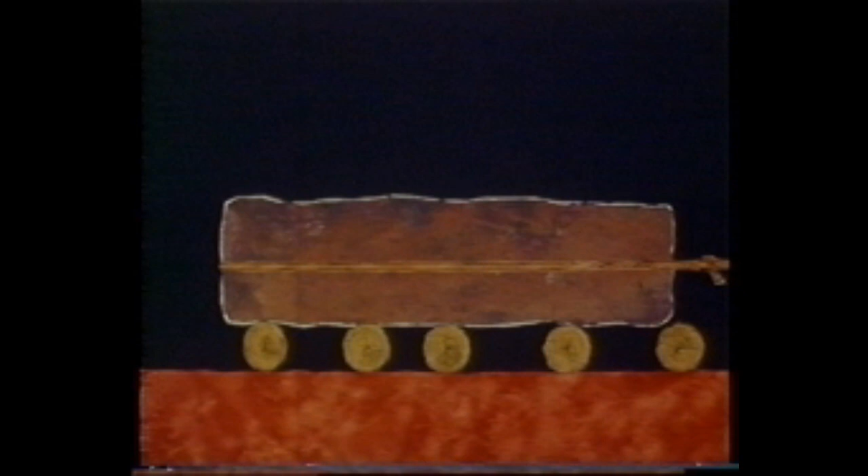Throughout history, man has striven to move large and small objects, sometimes over great distances, to where they would be better suited to his needs. Circular tree trunks used as rollers made the task of moving heavy objects somewhat easier. A way was then found of attaching the roller to the load, and so the wheel was evolved.

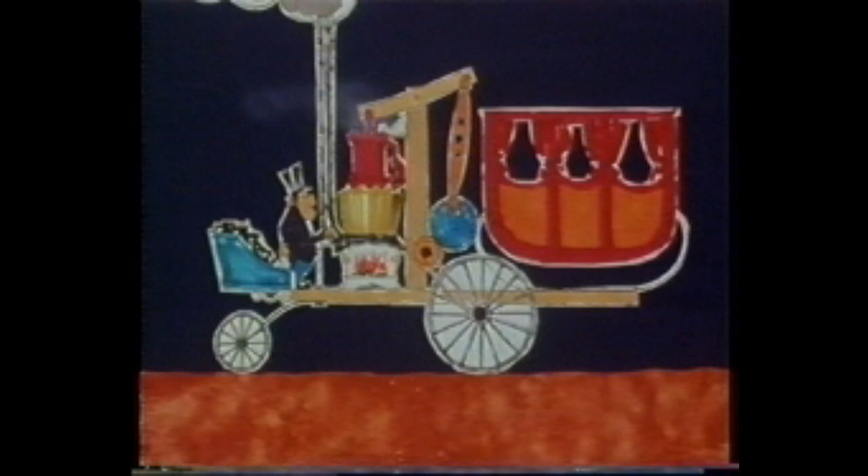It wasn't long before man tired of pulling his carts about. Looking for an alternative prime mover, he came on the use of animals. But like men, they proved to be temperamental, so other forms of motive power were sought. Eventually steam was recognized as a driving force, though not a very efficient one, so the search for improved performance continued.

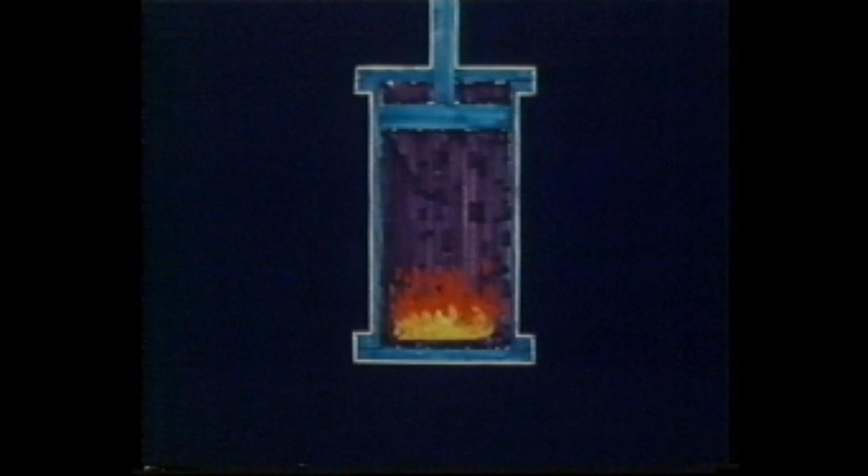An idea to burn fuel inside the engine cylinder led to the development of the internal combustion engine. Attempts were made to burn a variety of fuels, including pulverized coal dust, coal gas, lamp oil, and even gunpowder.

In today's engines, the two most commonly used fuels are petrol and diesel oil, both of which are obtained by distillation of crude oil.

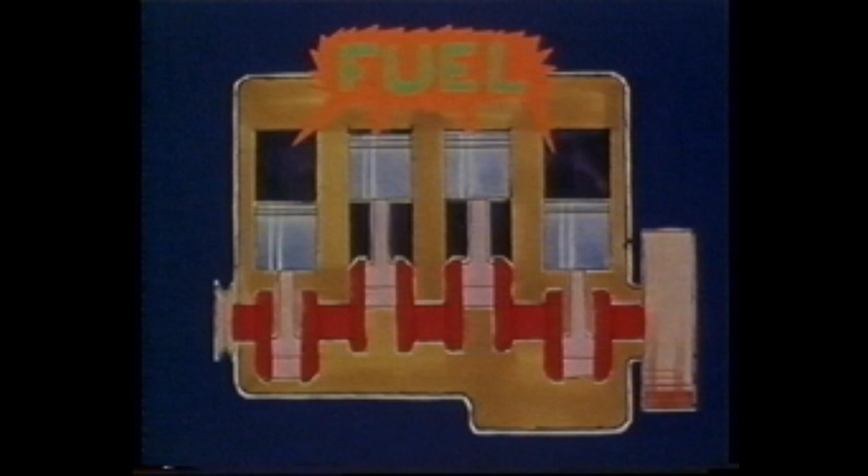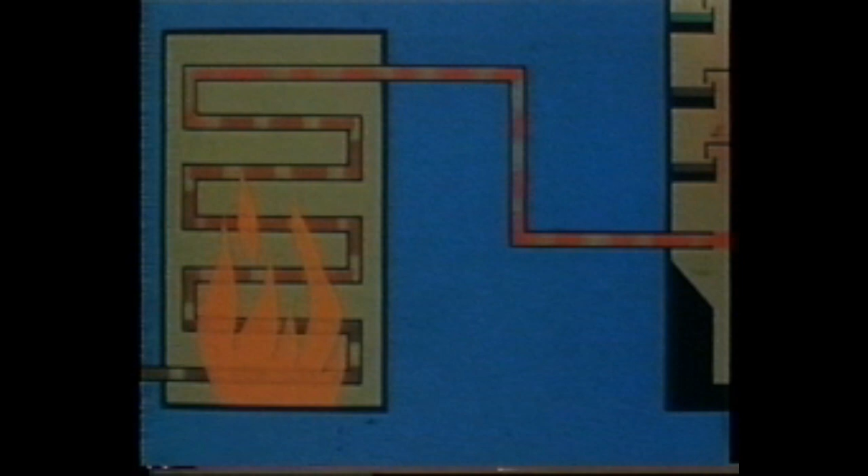Distillation, in simple terms, means that the crude oil is heated until its constituents reach their boiling points. The vapors that are given off by the boiling crude oil are passed into a tower. Because these vapors are of different densities, some rise more than others within the tower. As they cool, they revert to liquid, which is collected in a series of trays at various heights.

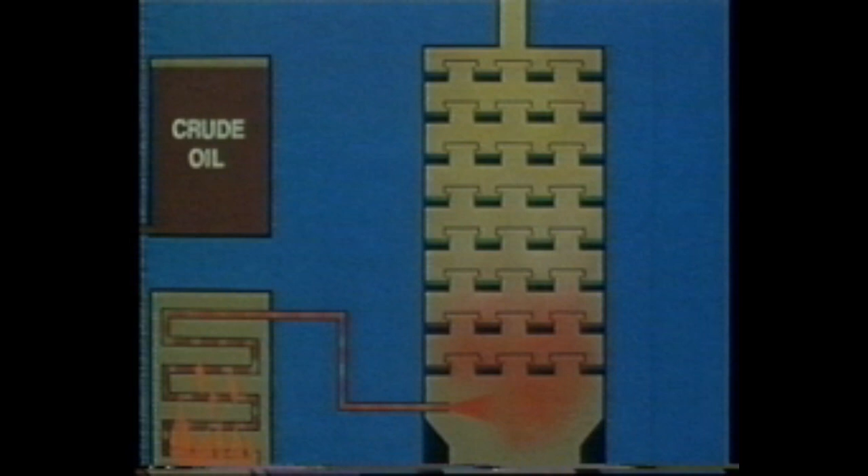From near the base of the tower, the heavier oils used in lubrication are removed, whilst higher up, lighter oils such as diesel oil are obtained, and near the top of the tower, high-grade petrol. There are, of course, many other fuels and petroleum-based products obtained from trays between those shown.

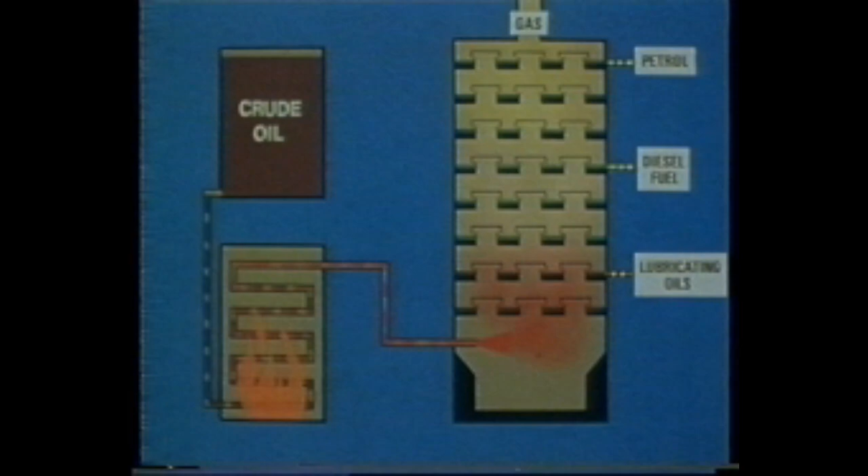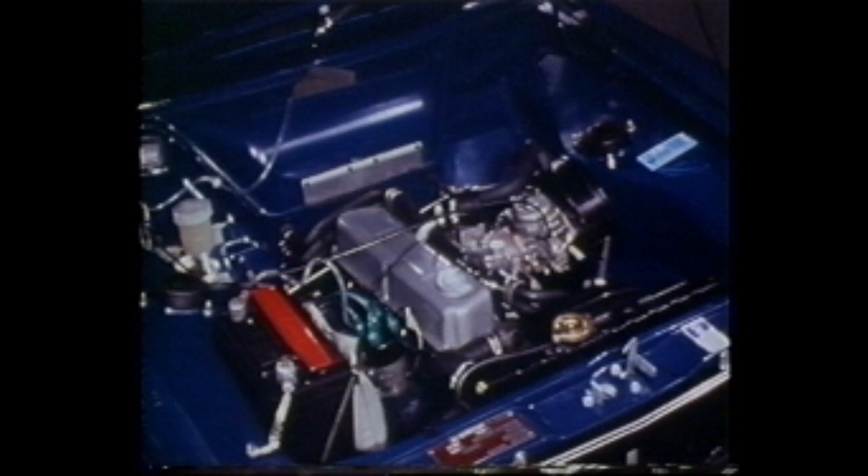Neither petrol nor diesel fuel enters the working cylinders of an engine in a normal liquid state. In the case of the petrol engine, fuel is reduced into fine droplets by a carburetor, which also mixes the fuel with air before it's burned in the engine cylinders.

In a four-stroke engine with the inlet valve open and the exhaust valve closed, the first stroke of the piston draws the fuel-air mixture into the cylinder. This is the induction stroke.

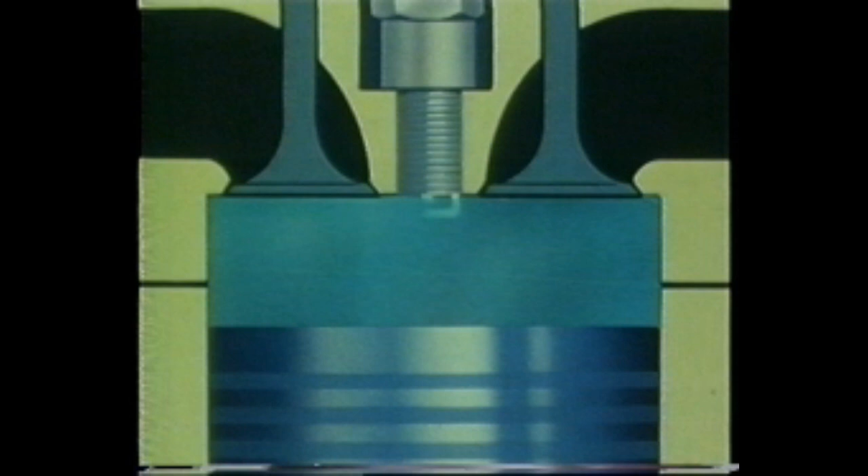The inlet valve then closes, the piston rises and compresses the mixture. The mixture is then ignited by a spark jumping across the electrodes of the spark plug. The burning gases expand and force the piston down. This is the power stroke.

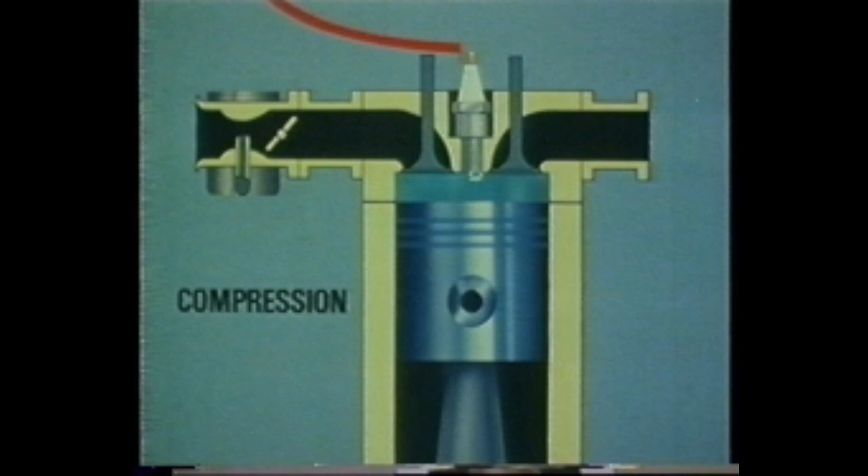At this point, the exhaust valve opens, the piston rises and the burnt gases are expelled. This is the complete four-stroke cycle: induction, compression, power, exhaust.

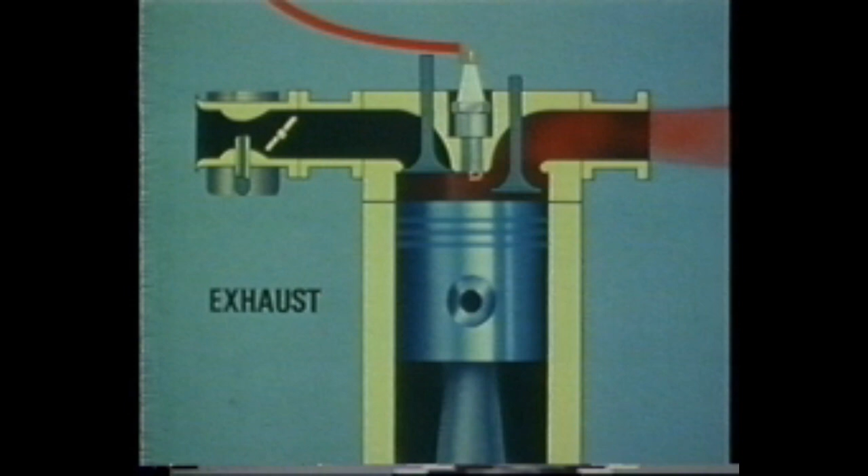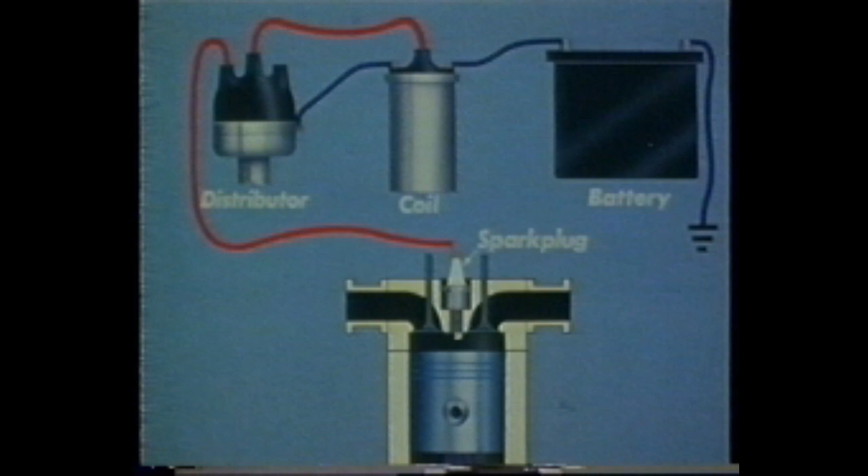The diesel engine looks very much like the petrol engine, but in several important respects, it's quite different. The diesel does not require a carburetor. The electrical ignition system and the spark plug are also unnecessary.

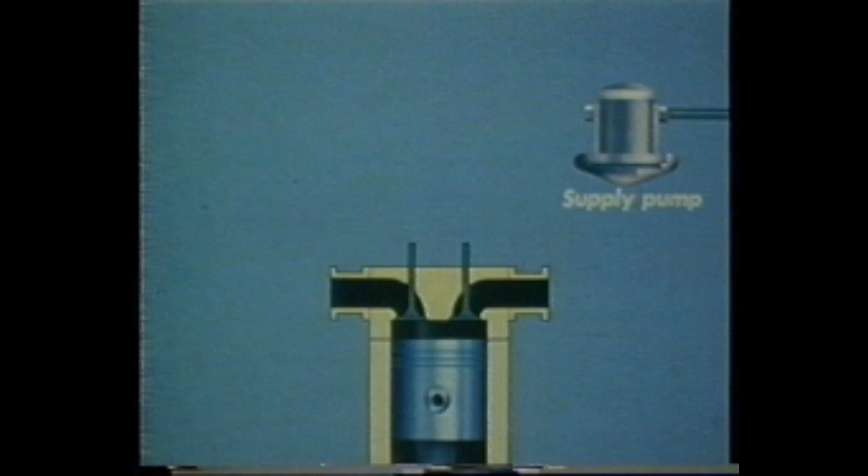However, the diesel does require fuel injection equipment. This consists of a supply pump, a fuel filter, and an injection pump, which feeds fuel to the engine cylinders through the injector.

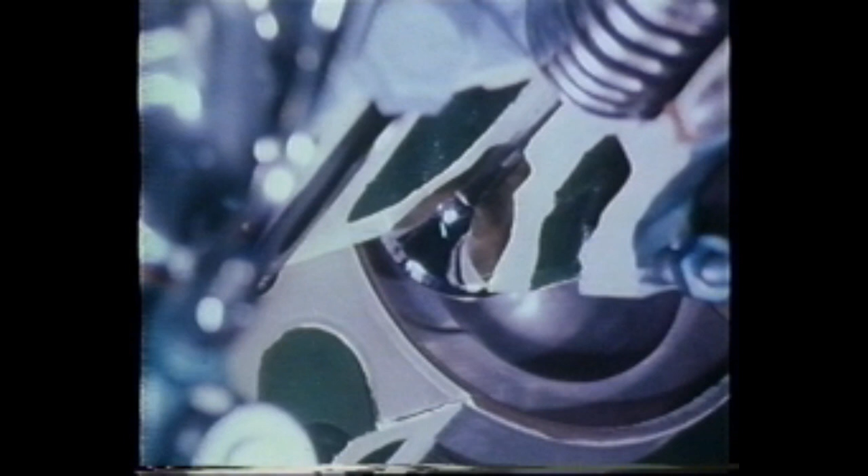There's one other significant difference. The diesel engine has a much higher compression ratio. In fact, the volume between the crown of the piston and the cylinder head at top dead center is usually less than half that of the petrol engine.

In a diesel engine, when the piston moves down on the induction stroke, it draws in not a fuel mixture, but filtered air. On the compression stroke, this air is squeezed into the small space at the top of the cylinder and is compressed to something like 1/20th of its original volume.

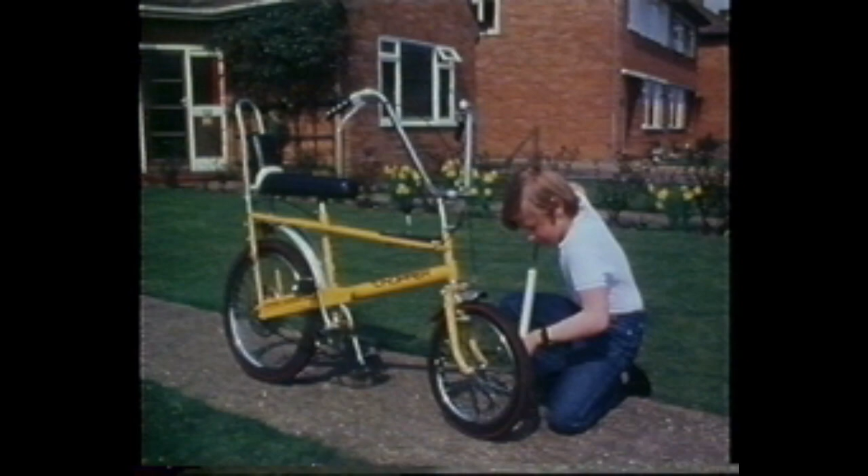As the air becomes compressed, so its temperature rises. This can be demonstrated when a flat tire needs pumping up. It's not just the boy who gets hot. The pump and connections also become heated as the air drawn into the pump cylinder is compressed and forced through the connection into the tire.

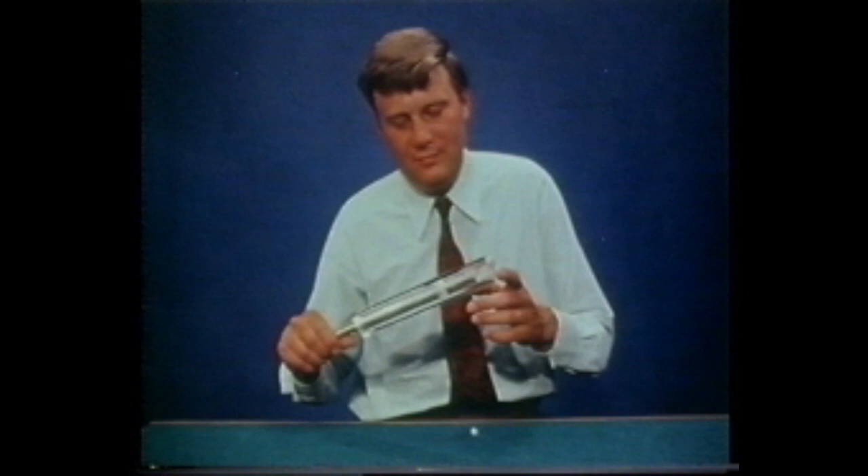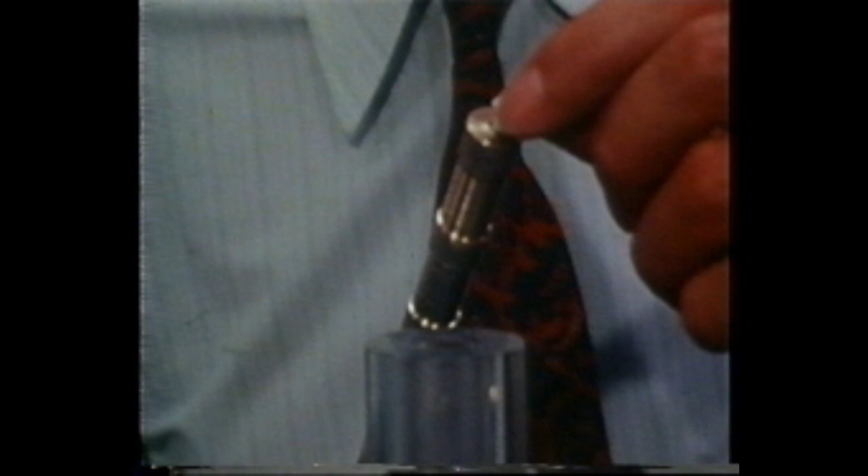A more striking example is a pneumatic match, which consists of a tight-fitting piston, a tube, and some tinder, which is placed on the end of the piston. Air is compressed on ramming the piston into the tube. Sufficient heat is generated to cause the tinder to smoulder, which with gentle persuasion bursts into flame.

The fact that air becomes heated on compression is used as the basis for the diesel principle. The temperature of the air within the cylinder reaches at least 500 degrees centigrade.

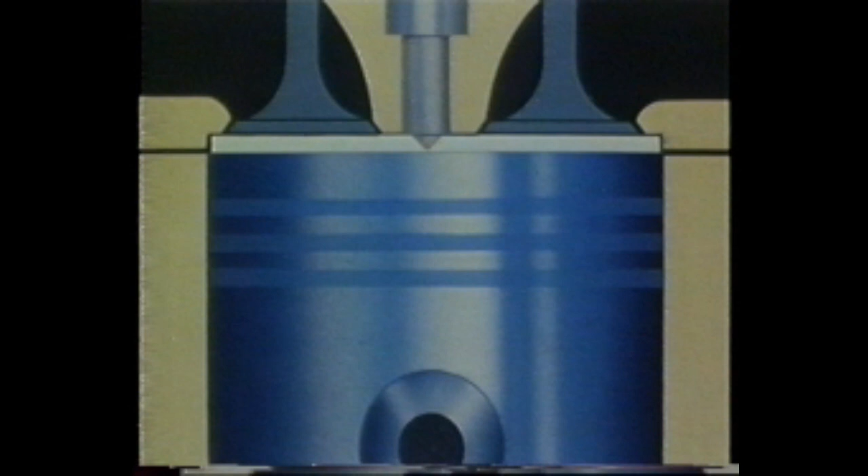It's at this point that the fuel is injected as a fine spray or mist. It then ignites without requiring a spark, and the expanding gases force the piston down on the power stroke. As the piston rises, the burnt gases are expelled. The full cycle once more.

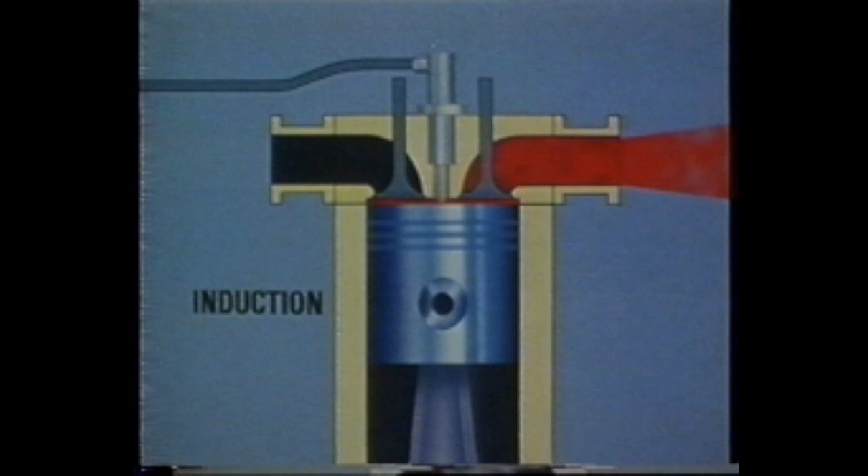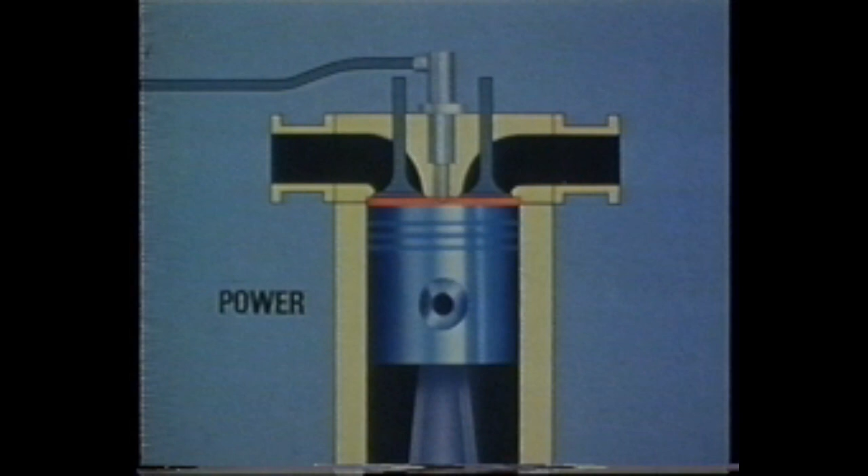Induction, drawing in just air. Compression, causing the air to reach a high temperature. At this point, the fuel is injected. The power stroke, as the burning gases expand. And finally, exhaust.

When cylinders are joined together to form a multi-cylinder unit, the power is also multiplied. In this way, engines can be made to suit a wide variety of power applications.

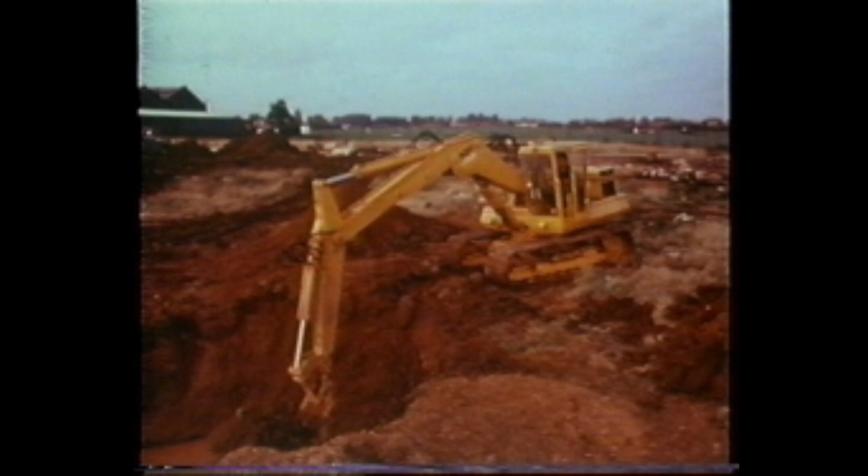The diesel's ability to maintain its power as the load increases makes it the universal choice for construction machinery. A different kind of performance is needed for road vehicles, where speed and loads vary continuously throughout the work period. Whether in long-distance haulage or door-to-door deliveries, diesel engines provide the most economic source of power.

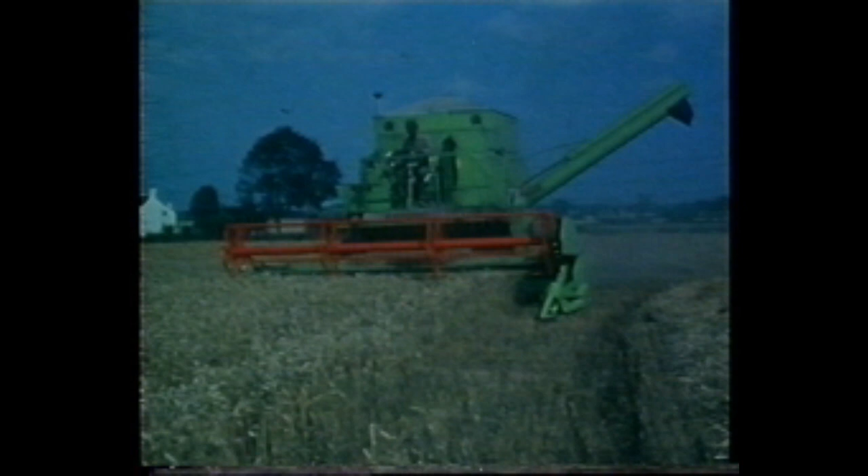But it's in food production that the diesel has made a great contribution. Harvesting, for instance, requires constant power with great reliability to gather in the shortest space of time the fruits of a year's work on the land. Throughout the world, diesel engines provide reliable and economic power.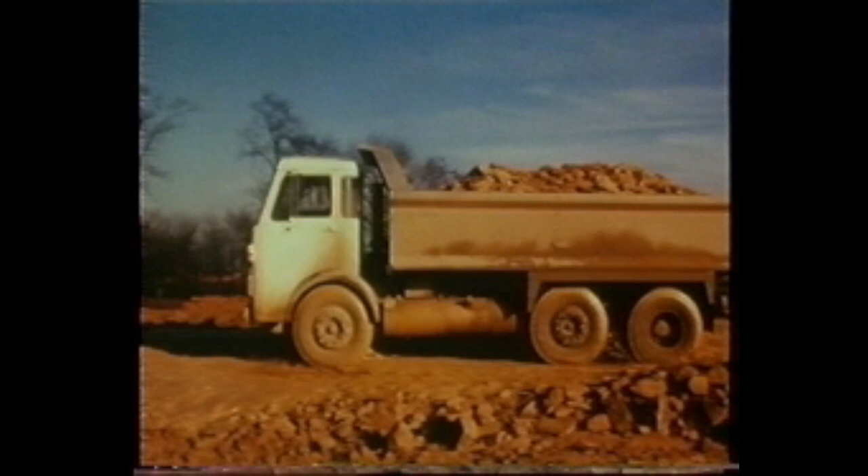The diesel engine is the accepted self-contained power unit for the modern railway. It also provides fast, flexible and reliable power for light and heavy transport on and off the highway. In marine craft of all types, it adds safety and reliability to performance. Construction, earth moving and road building all rely on this form of power.

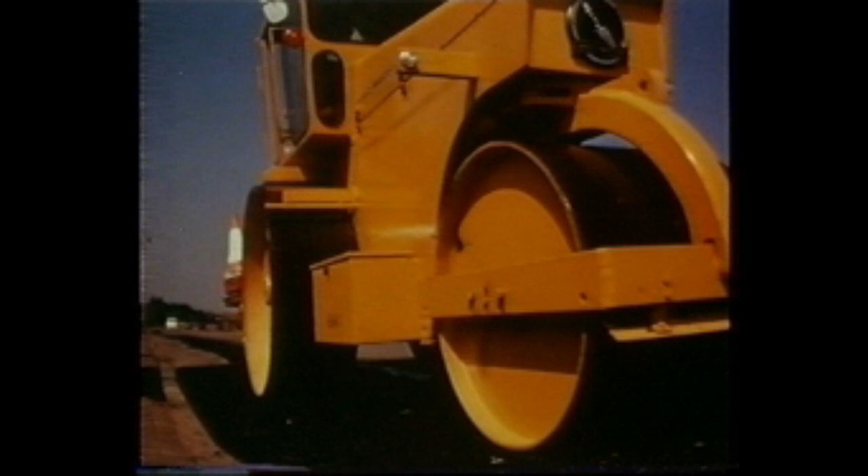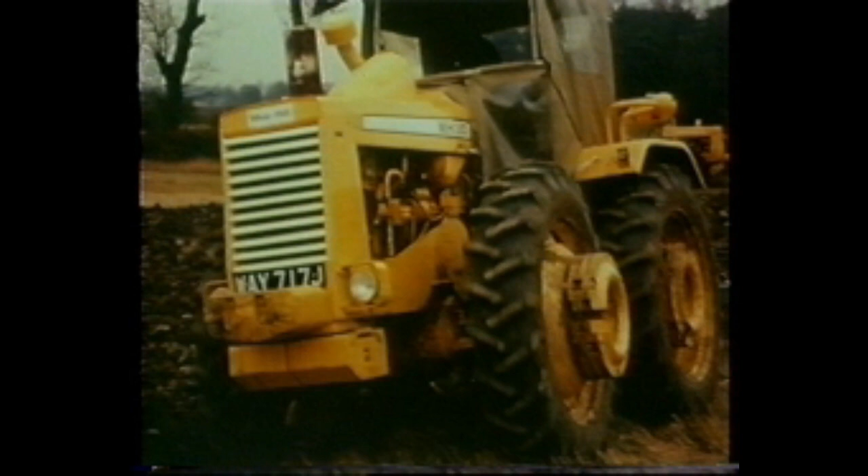In agriculture, all over the world, diesels are raising food production and living standards.

Now the diesel is a prominent member of a family of engines, heat engines. They all have a common purpose, to convert heat energy from fuel into useful mechanical work. All heat engines waste a proportion of the available energy in the fuel, but some waste more than others.

For example, diesel engine exhaust gases account for a heat energy loss of 24%. The cooling system and fan lose another 31%. Friction between moving parts and ancillary equipment account for another 11%, which leaves 34% for useful work.

Thermal efficiency differs with each type of engine. The lowest is the steam engine at 8%. The simple single-shaft gas turbine is next at 16%. The steam turbine rates 28%. A good petrol engine, 23%. So with 34%, the diesel is clearly a leader in fuel utilization.

In an internal combustion engine, a principal factor in the extraction of work from fuel is the compression ratio. This is the total volume of air drawn into the cylinder by the piston on the induction stroke, divided by the volume above the piston at the end of the compression stroke.

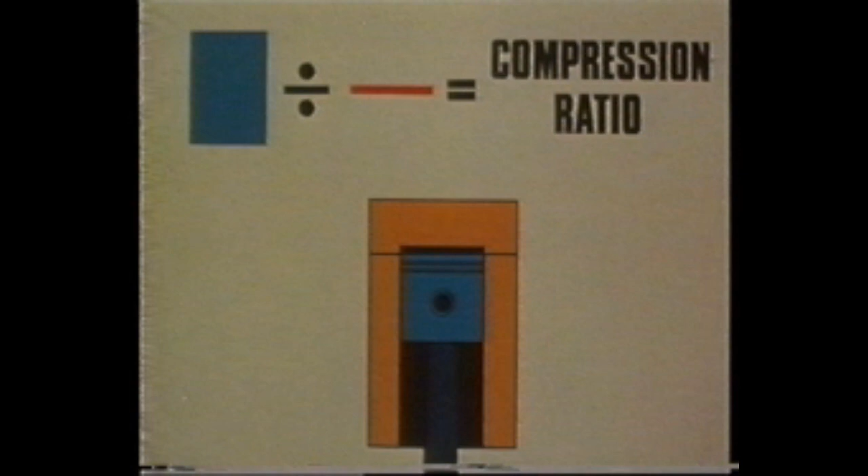The diesel engine has a compression ratio approximately twice that of a petrol engine.

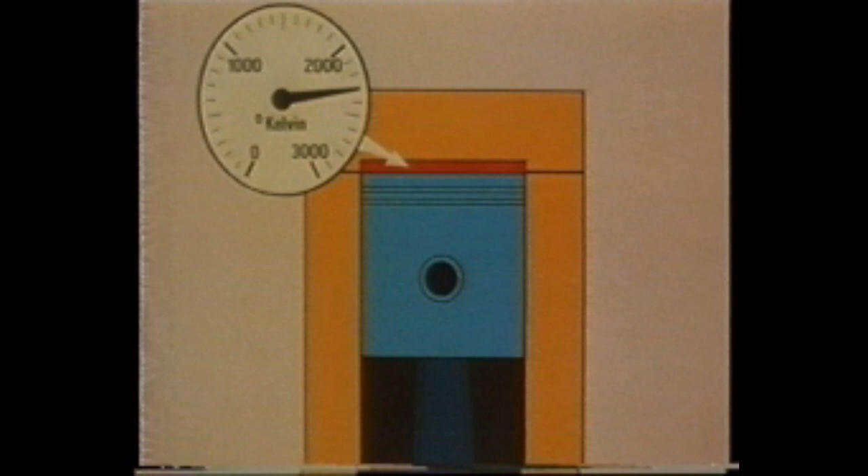The performance of all heat engines is determined by the drop in temperature of the gases during the power stroke. The temperature at combustion is approximately 2,300 kelvins. Because gas loses heat in relationship to the amount it's made to expand, at the end of the power stroke, it's at approximately 900 kelvins. This difference in temperature is a measure of the engine's thermal efficiency.

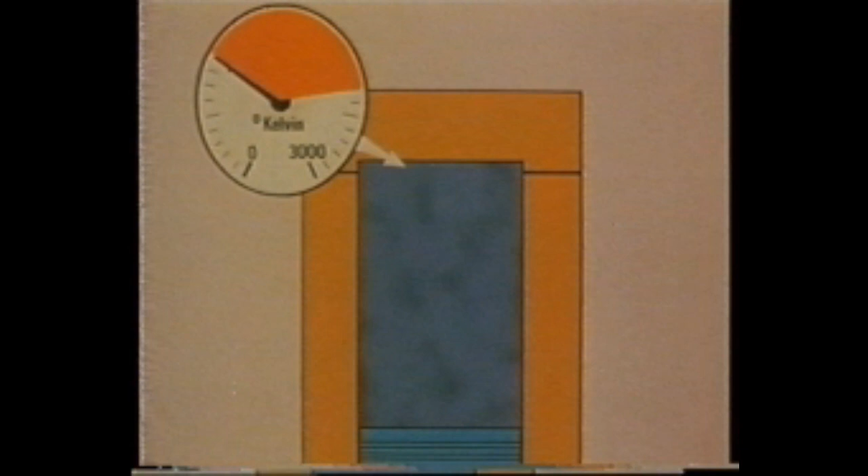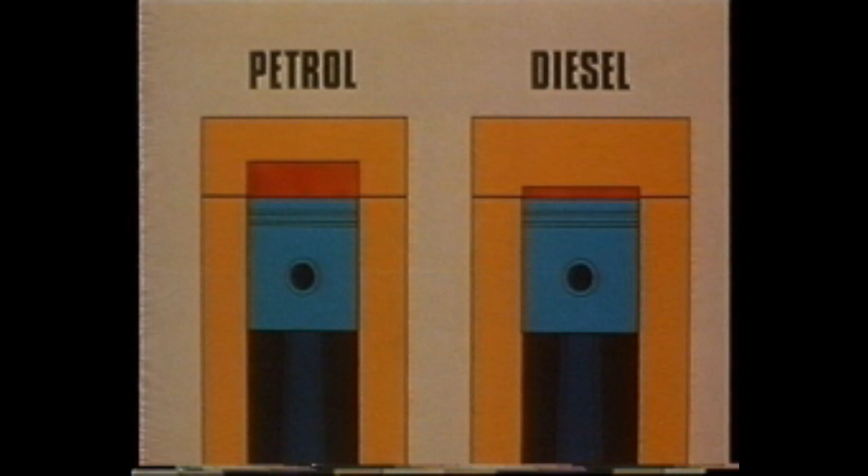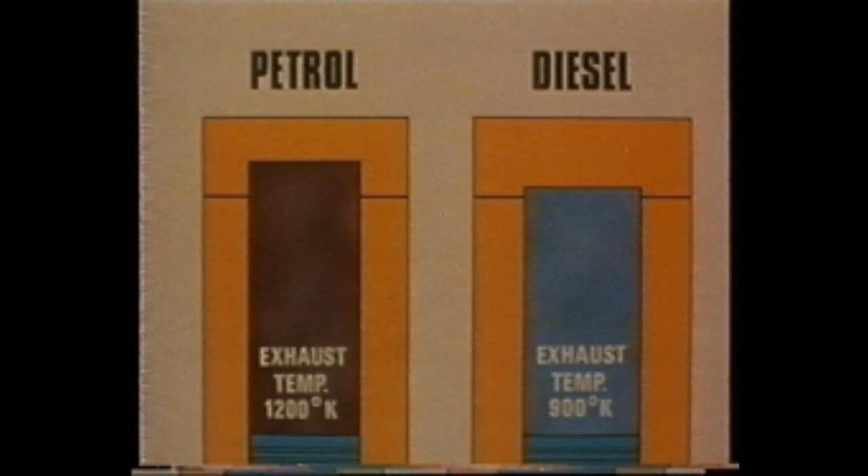From this, it's clear that the expanding gas plays an important part in this cycle. In the diesel, the gas starts in a more highly compressed state than in the petrol engine. On combustion, it therefore expands through a greater range, finally to exhaust at a lower temperature. When the efficiencies are compared, the diesel is shown to be the most economic.

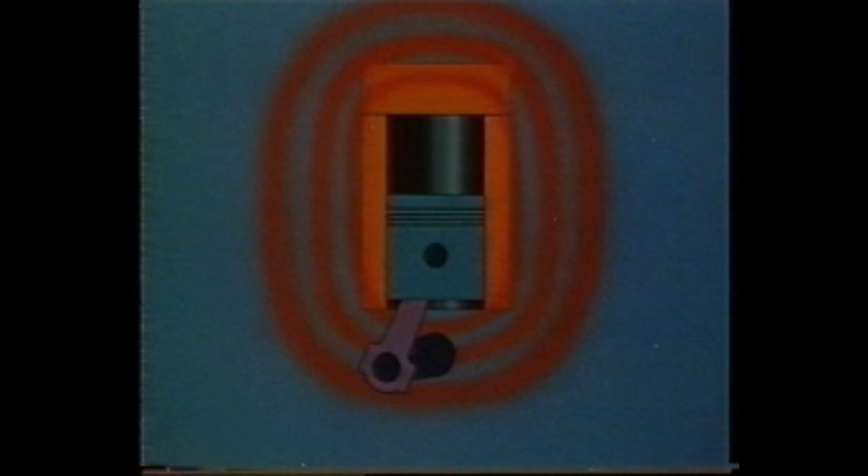It's important, however, that the remaining heat absorbed by the engine structure is controlled by a suitable cooling system. This is demonstrated in this laboratory exercise, where an engine will be deliberately overheated until component failure occurs.

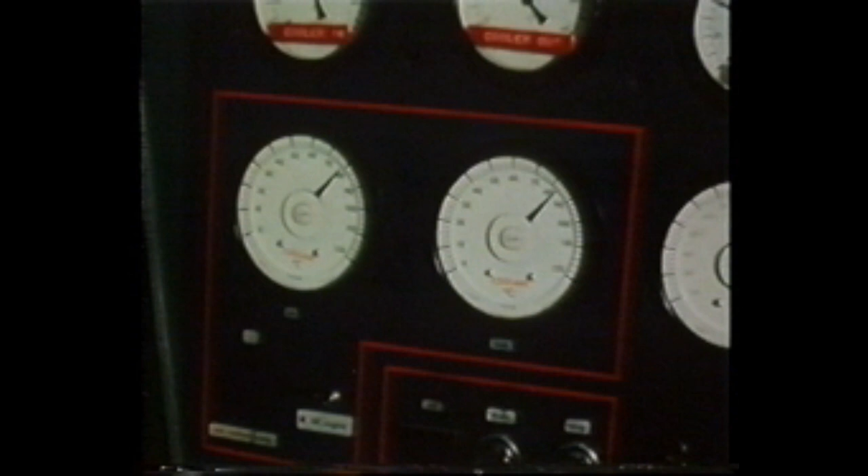First, the engineer checks that all systems are functioning normally. The load on the engine is then increased and the throttle setting advanced to maintain the engine speed. An immediate rise in temperature is shown on the gauge as the engine is made to work harder.

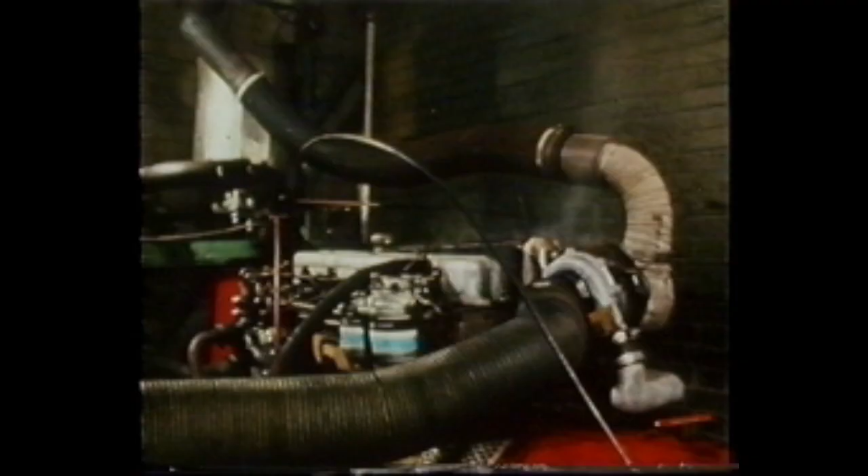The coolant flow is then restricted, and a further rise in temperature is indicated. Eventually, the engine grinds to a halt as running clearances are taken up by expansion and the properties of the lubricant are broken down.

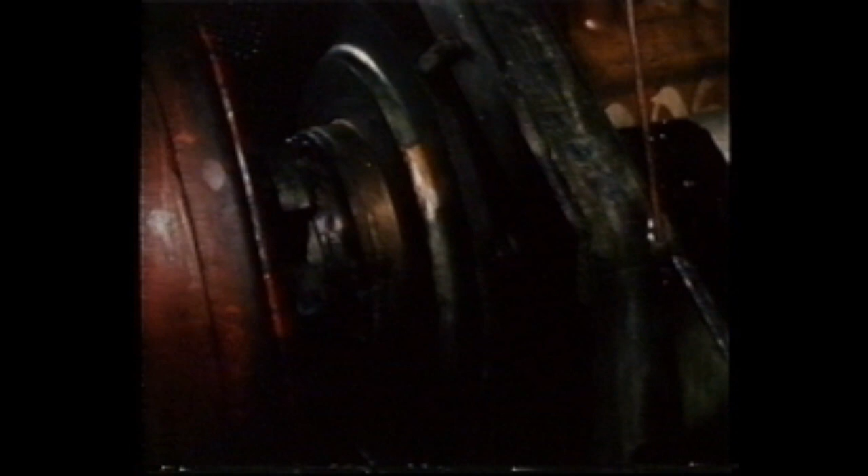This piston, removed from a test engine, shows clearly the effects of coolant and lubrication failure. It's essential to keep the engine temperatures within working limits. By far the commonest system is liquid cooling, in which the coolant is pump circulated round the hot surfaces and through a radiator to be cooled.

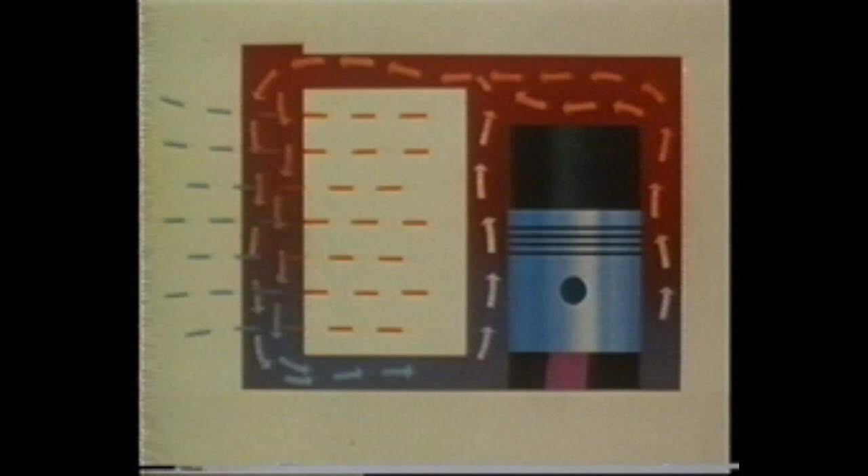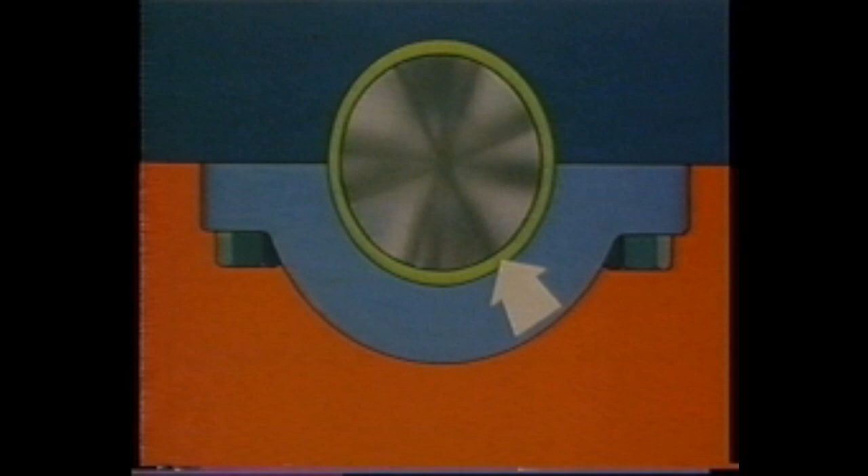Excessive friction and metal-to-metal contact is prevented by providing a film of oil between all moving surfaces. The oil pump is an important component in providing an adequate flow of lubricant. The compact and very efficient lobe type is shown here.

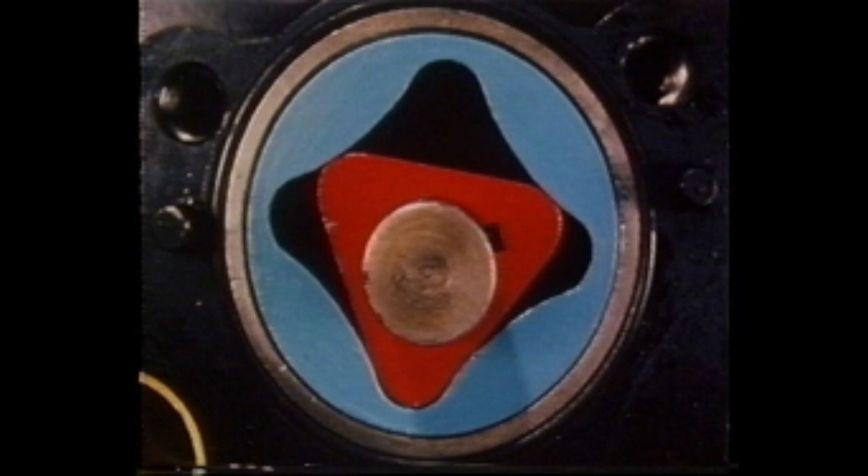The pump circulates oil under pressure through a filtering unit to the main, big end and camshaft bearings. The reduced flow lubricates valve guides, tappets and the timing gear train.

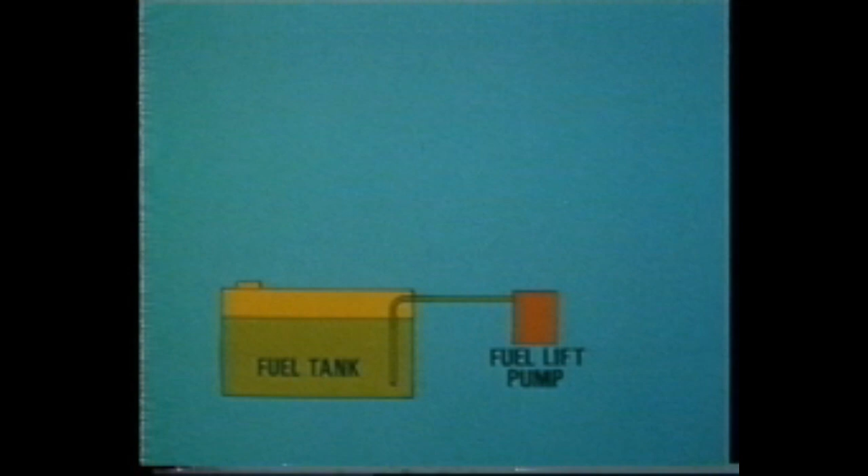The next important function is that of the fuel system, which consists of a fuel tank, a lift pump, a filter, a fuel injection pump, the output of which is controlled by the operator through an overriding speed governor, and the injector or atomizer.

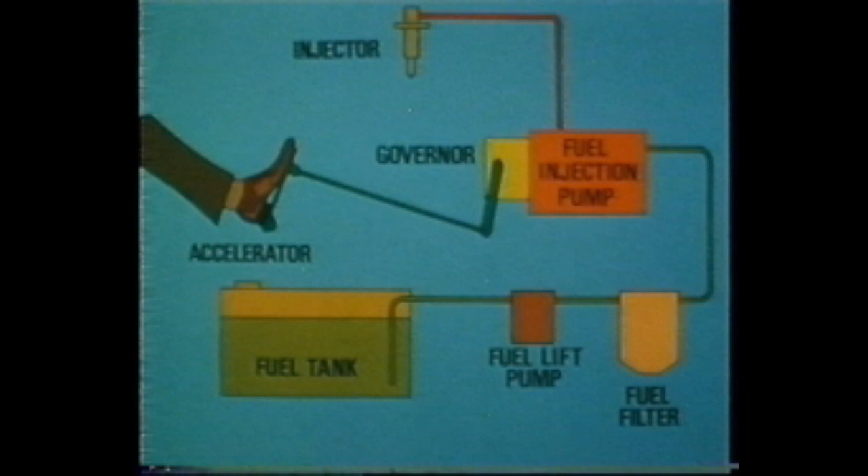The two main types of fuel injection pump in use are referred to as inline and rotary. This one is an 8-cylinder inline pump.

The inline pump consists of a series of cam-operated plungers, one for each engine cylinder, each plunger being moved up and down in its barrel by the appropriate cam lobe. To vary the engine speed, the plunger is rotated in its barrel by a linkage connected through a speed governor to the accelerator pedal.

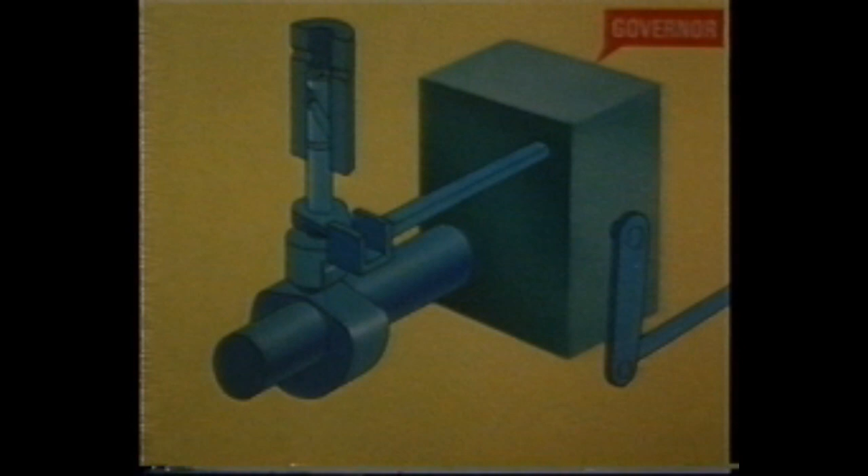The amount of fuel delivered, and thus the engine speed, depends on the relationship between a helical groove machined in the plunger and the fuel exit port, or spill port. This is a cross-section of a pumping element and fuel supply gallery in which fuel at low pressure is shown in yellow.

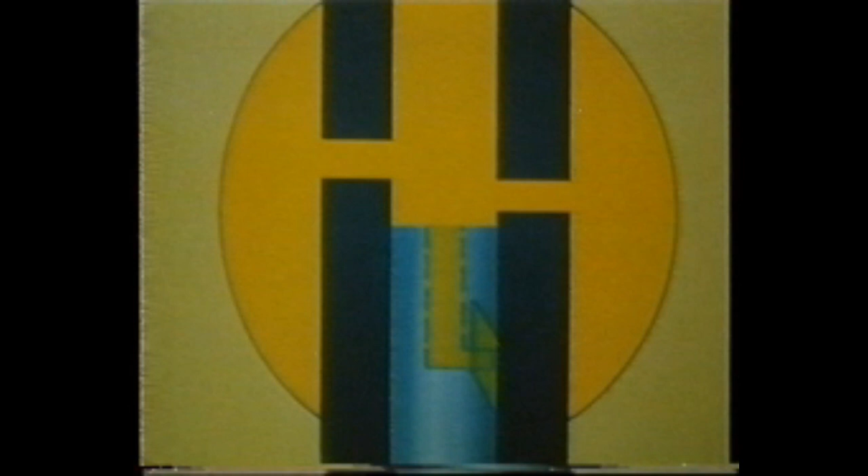As the plunger moves upwards, the spill port and supply hole are closed, so that fuel, now shown in red, rises in pressure until the resistance of the spring holding the injector needle closed is overcome. This is the point of injection, and the fuel continues to be delivered until the helical groove aligns with the spill port, allowing the pressure to fall.

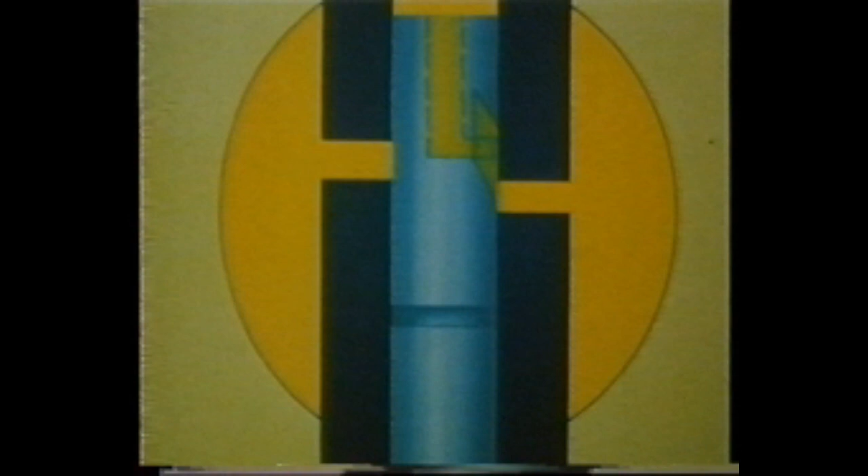It can be seen, therefore, that by rotating the plunger, the relationship between the helical groove and the spill port can be changed, so that the power and speed of the engine can be varied by either increasing or decreasing the amount of fuel delivered.

The distributor-type injection pump has only one pumping element, and this is connected in turn to an outlet for each cylinder through a distribution rotor.

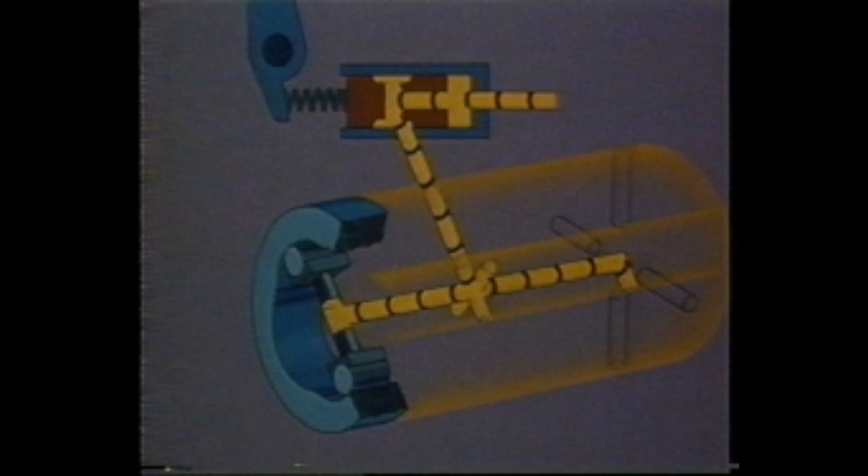Shown diagrammatically, a metering valve determines the amount of fuel delivered. This fuel, shown as yellow, passes to an inlet port and is admitted to an axial passage in the distributing rotor.

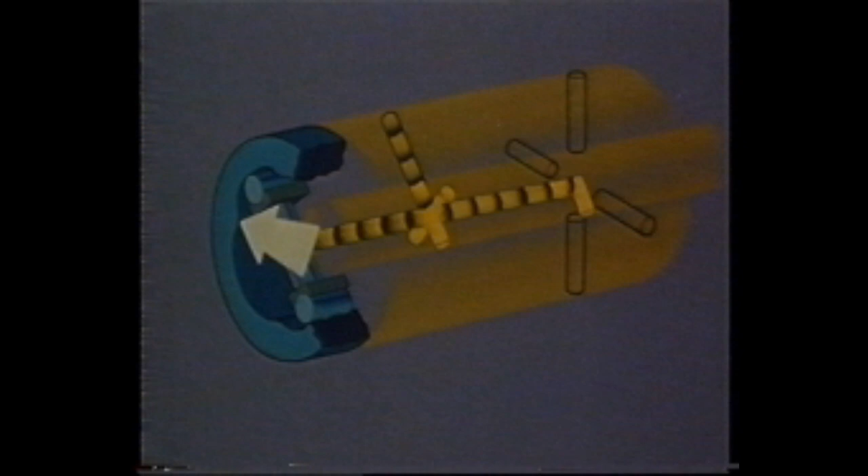The rotor, containing two plungers, turns within a cam ring. Lobes in the cam ring actuate the plungers, which apply pressure to the fuel, now shown in red. As the rotor revolves, a passage is brought into line with each outlet port in turn, allowing fuel to pass to the injectors at high pressure.

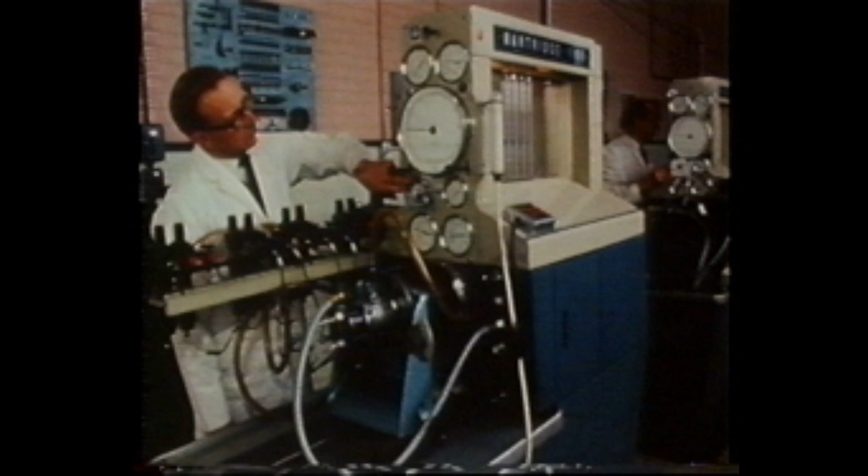The accuracy with which the fuel is measured by the fuel pump's metering system is carefully checked during manufacture and again before installation in an engine. Each outlet is fed into a calibrated container where it is compared with the standard laid down for the required engine performance. In this example, a 4-cylinder pump is under test.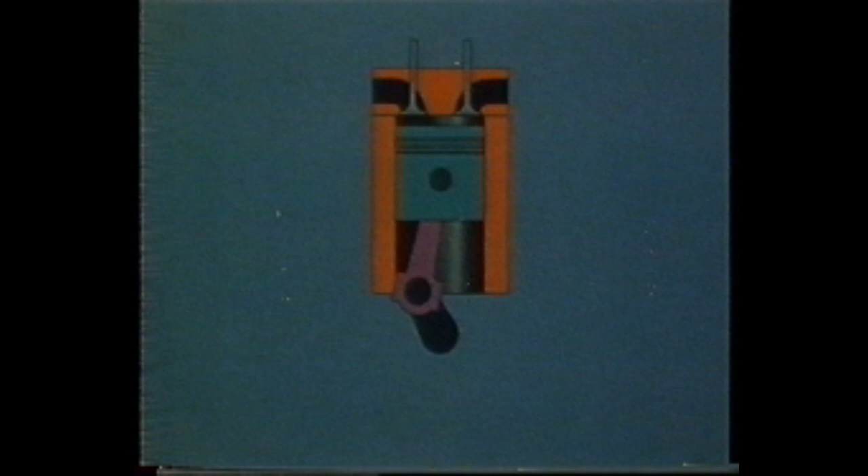Whichever type of injection pump is used, the important consideration is to deliver the fuel at the right time. To achieve this, a gear at the end of the crankshaft, through an intermediate gear, drives the camshaft, which actuates the inlet and exhaust valves.

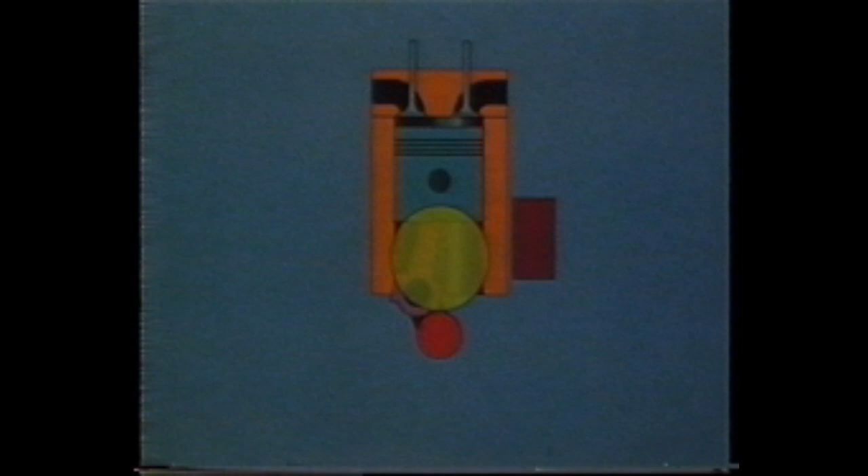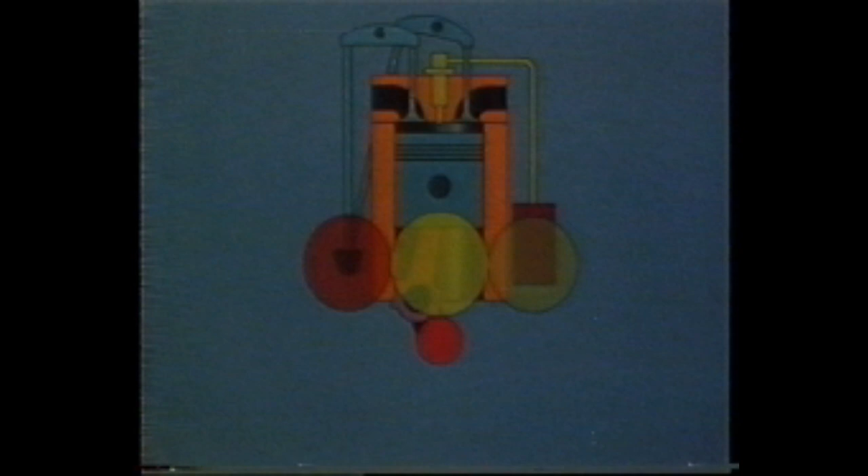The intermediate gear also drives the fuel injection pump and determines the exact time fuel enters the cylinder. In practice, fuel is delivered at a pressure of approximately 2,500 pounds per square inch when the piston is a few degrees before top dead center.

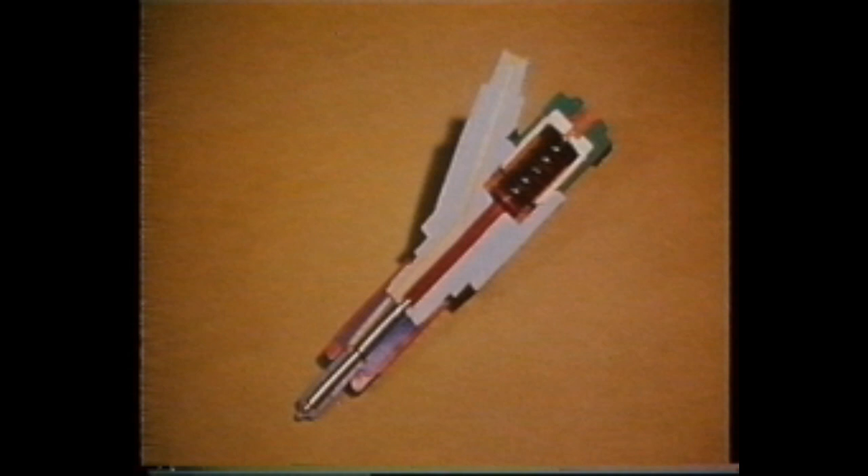Because diesel fuel will only burn readily when atomized, each cylinder is equipped with an atomizer or injector to break up the stream of fuel. This fuel must be mixed thoroughly with air drawn into the cylinder during the induction stroke and compressed by the piston during the compression stroke.

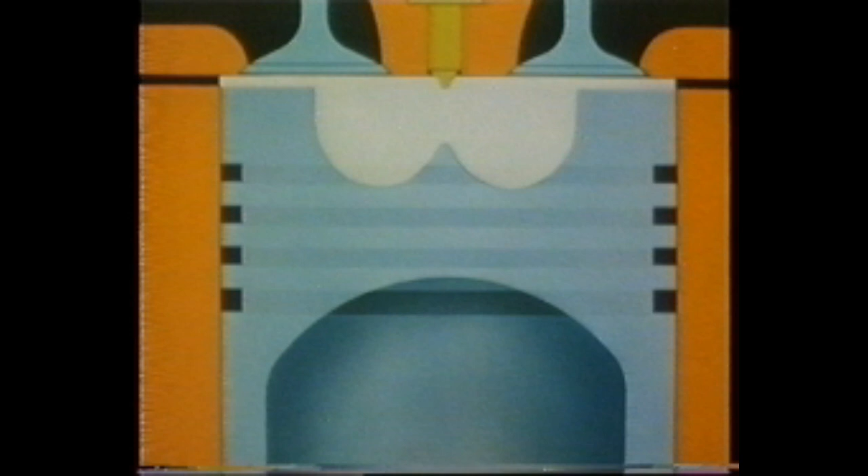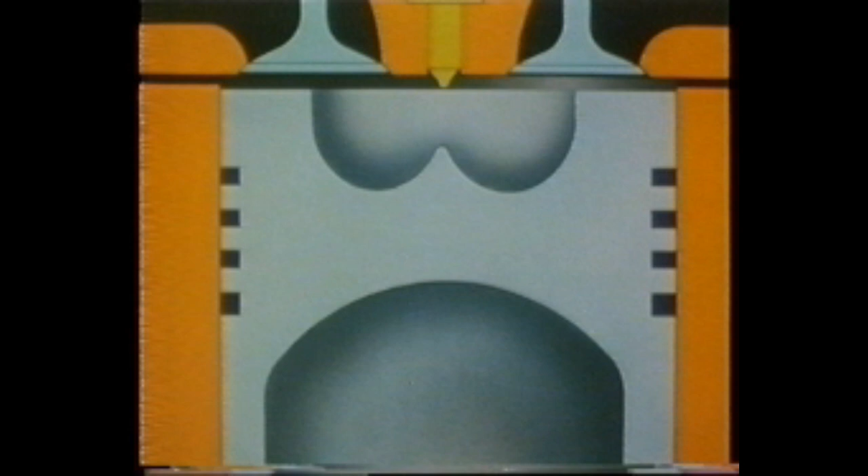Complete mixing and complete combustion is created by a controlled movement of air in the combustion chamber. There are several ways of doing this. Two basic methods can be illustrated: direct and indirect injection.

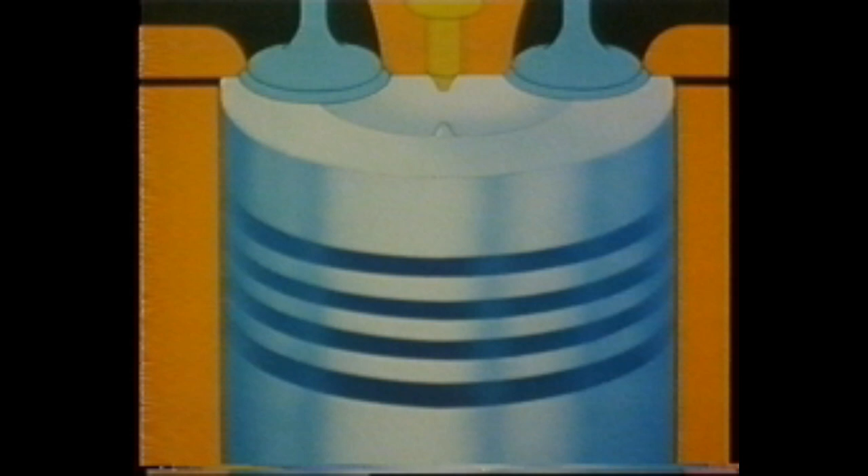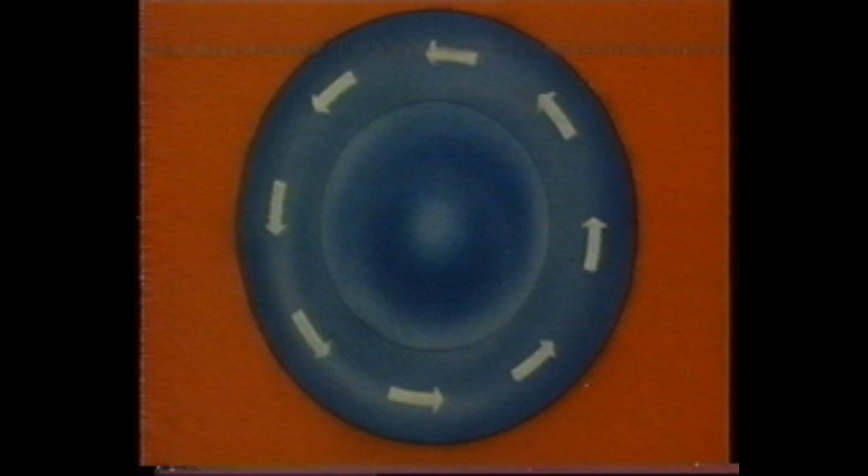In the direct injection system, the piston has a specially shaped cavity in the crown. As the piston descends and the valve opens on the induction stroke, a spiral motion of air is created within the cylinder. As the piston rises, the swirl is forced to contract within the piston cavity, and its velocity, therefore, is increased. On each compression stroke, a spray of fuel is admitted, and each droplet is carried round by the whirlpool so that it mixes with the maximum amount of air to achieve complete combustion.

In the case of the indirect injection system, the injector is positioned within a separate chamber in the cylinder head, and the piston has a flat crown. On the compression stroke of the piston, an accelerated swirling air movement is created in the chamber by passing the air through a specially shaped passage into which the fuel is injected a few degrees before top dead center.

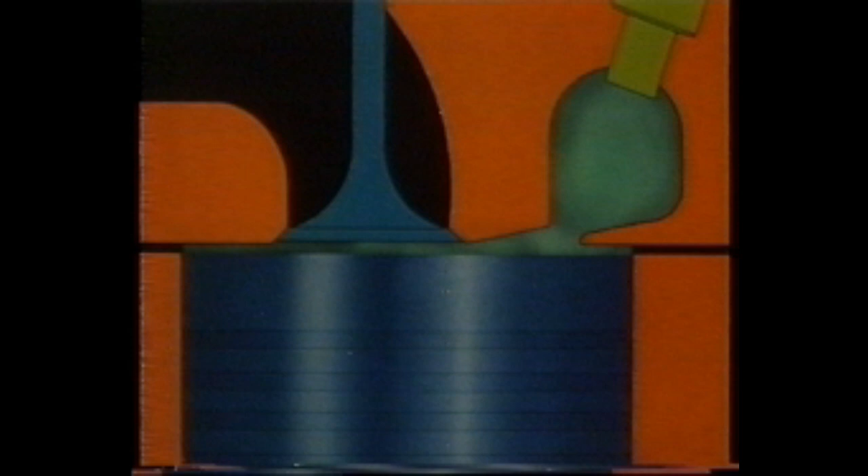These two Perkins diesel engines are externally very similar, but one is a direct injection engine with the combustion chambers formed in the crown of the piston, whilst the other is an indirect injection engine with the combustion chambers formed in the cylinder head. Whichever system is used, direct injection or indirect injection, the diesel converts fuel into work more effectively, more cleanly, and more economically than any other form of heat engine.